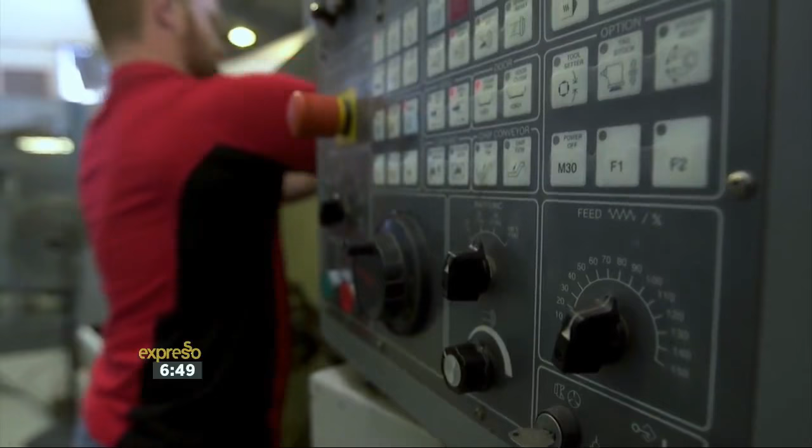I'm Renier Wepener. I'm a CNC programmer setter. When you love what you do, you'll never work a day in your life.

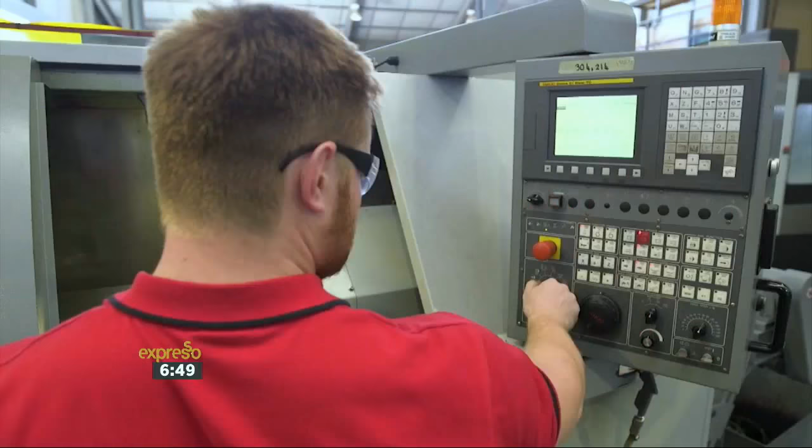So I'm a CNC machinist. I'm also the setter and programmer. It stands for computer numerical control, so everything is controlled by a computer.

When I was way younger, me and my father had a discussion of what I want to do when I'm done with school. Growing up in a house where my father is a fitter and turner, I enjoyed what he did, so that's what I wanted to do.

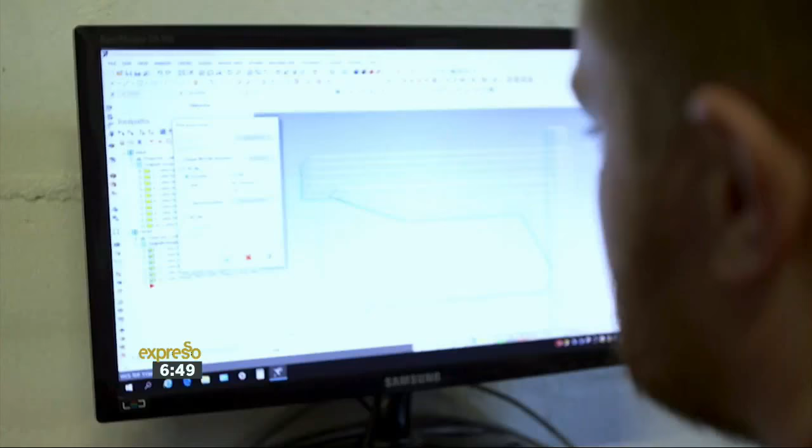I love what I'm doing, so it doesn't feel like work. It doesn't feel like a struggle getting out of bed in the morning.

When I was a young age, I started working at this company. I think I was 15, 16 years old. I started working here in the holidays, school holidays.

I first helped cleaning. From there, they put me on assembling parts and stuff. Then I was on the small machine in the front. There I made my first project, which was to make pins.

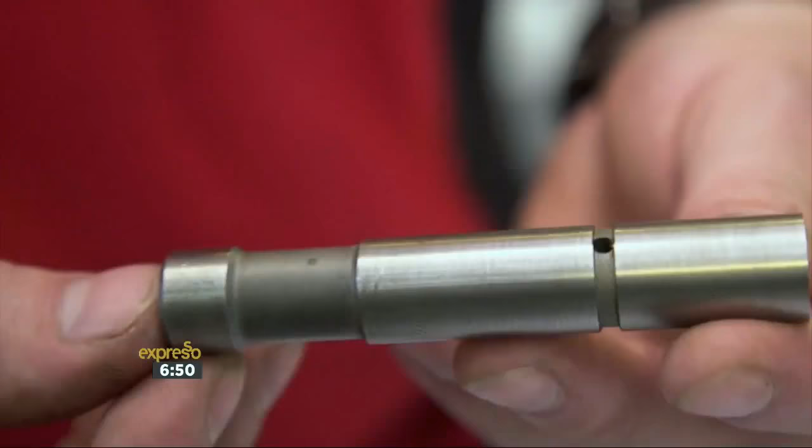I'll never forget the first part I made. I mean, you feel so proud.

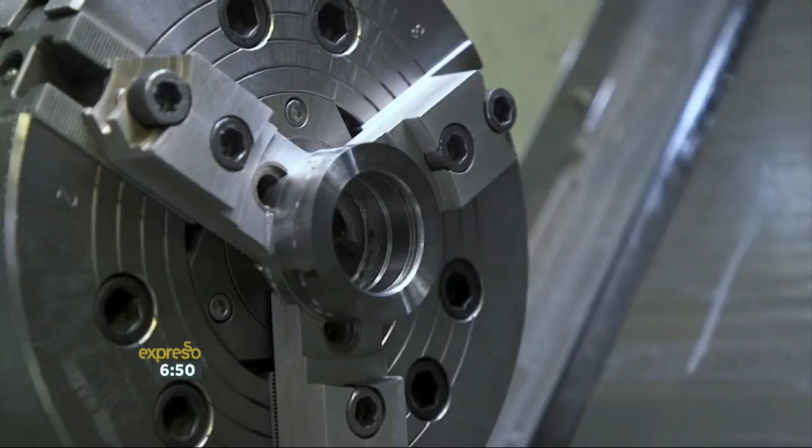With CNC there's endless possibilities. You can basically do anything and sculpt anything, any part out of raw material. And yeah, I just love the fact that you can make something which you need.

First, what would happen is the customer would come to us, give us a drawing and an explanation of what he wants. Then from there, we'll order the material. When we have the material and everything, we'll start programming.

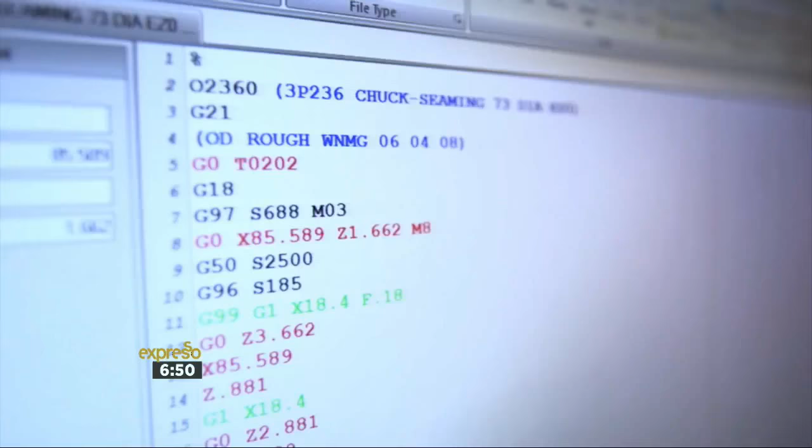From there, the toolpath is generated into a program. The program is sent to the machine. Once the program's on the machine, I set my tools accordingly to the specific job I have to do.

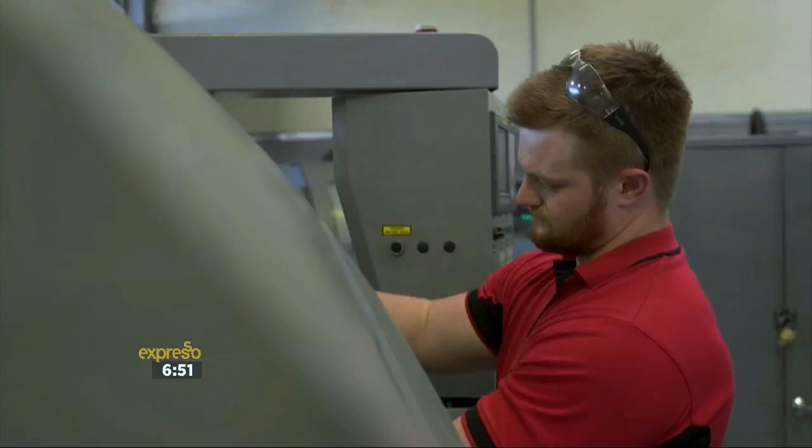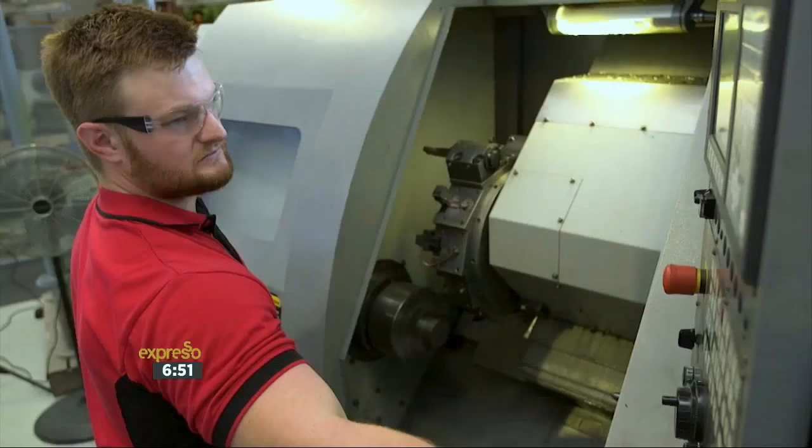If it needs to be bored or just an OD turn, then the material will go into the machine. I'll set my tools, press cycle start, stand back, and then if everything is done correctly, the part will be 100%.

We also send parts for hardening, so in many cases we'll get a part, we'll turn it, we'll send it for hardening, but we'll leave more material on the part. When the part comes back from hardening, it will go into the grinding, which can do more specific tolerance sizes.

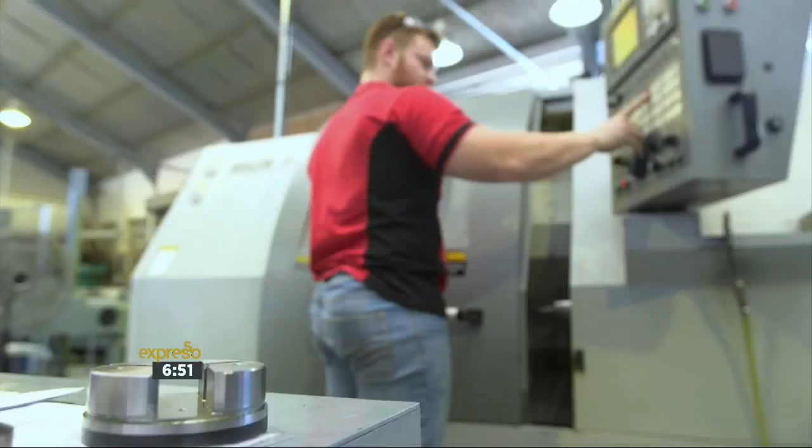We work with tolerances of 0.005, and if you take the width of your hair, it's 0.1. So if you divide your hair into 100 pieces and take 5 of those pieces, that's the tolerance we work in. So when I'm able to do it and get it right, I feel like, man, I've got this, I've got this.

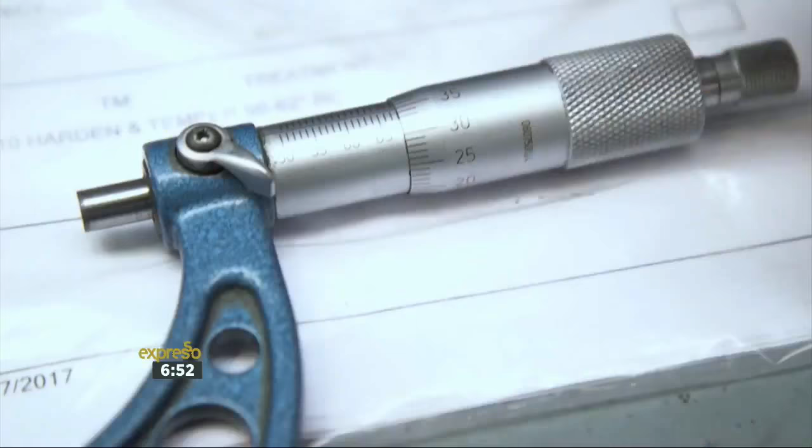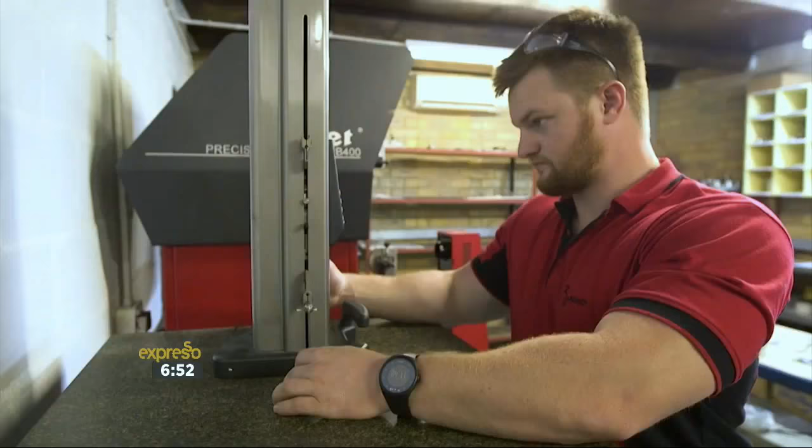My advice for the young guys, don't think it's the easy trade, the easy way out. Doing this is just as difficult as doing something at a university. This is more the practical side, the fitting and turning side of engineering, which we're doing here, and also the CNC part of making and sculpting parts. I won't say it's difficult, but as I said, if you love what you do, you'll never work a day in your life.